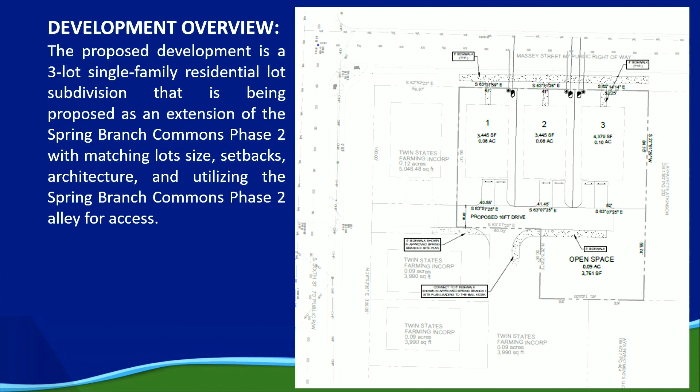The Spring Branch Phase 2 is still owned by Twin States Farming, even though a developer has a plan approved, it still hasn't changed ownership as of today. So this was Spring Branch Phase 2. That alley, as shown, would be extended; the leftmost alley would be extended up into this new property.

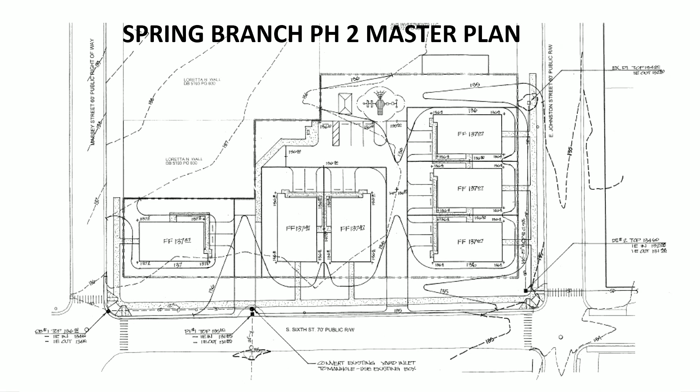These were the houses proposed in Spring Branch Phase 2 and are currently under construction in Phase 1 across the street. The Massey Street subdivision will be about the same size homes, but they will be two-story. You can see they have board and batten, lap siding, and shakes.

A little more elaborate than Spring Branch Phase 2, the plans are consistent with the comprehensive plan guidance. The comprehensive plan guides this area for medium-density residential with a density of 9.68 units per acre. This development will have a density of 8 units per acre.

The 3 lots will have street frontage on Massey, but vehicular access in the rear via a 16-foot wide private alley, again, same as Spring Branch Phase 2.

Because Spring Branch Phase 2 has not been constructed, a condition of approval would be that an access easement be secured for alley access to South 6th Street if this project were to precede the other. It needs the other project to move forward, or they would have to build an alley and an easement on that property. So that is a condition of approval because it's essential for that to be built.

The proposed development will provide 5-foot sidewalks in the Massey public right-of-way and a sidewalk behind the homes to provide access to the mail kiosk in Spring Branch Phase 2. I think they actually modified that recently with their own mail kiosk to not confuse the two different projects, so they could move forward earlier.

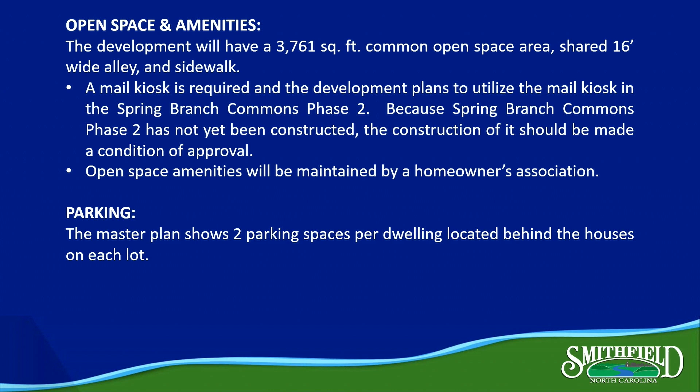The master plan shows 2 parking spaces per dwelling located behind the homes on each lot. Again, this is in walking distance to downtown. This is a development that could survive with fewer vehicles than elsewhere in town.

This development, as I said, will have 49% impervious, and that stormwater pond will likely appear on the construction drawings. They have no architectural design standards drafted. However, the footprints, again, match Spring Branch Phase 2, and the elevations they provided are fairly elaborate.

Required buffers are shown. Required trees and foundation plantings are shown. Trash will be from rollouts, and there'll be a space behind the homes for those. And another condition of approval would be to provide the matching fencing that was approved with Spring Branch Phase 2 so that it's continuous for the block.

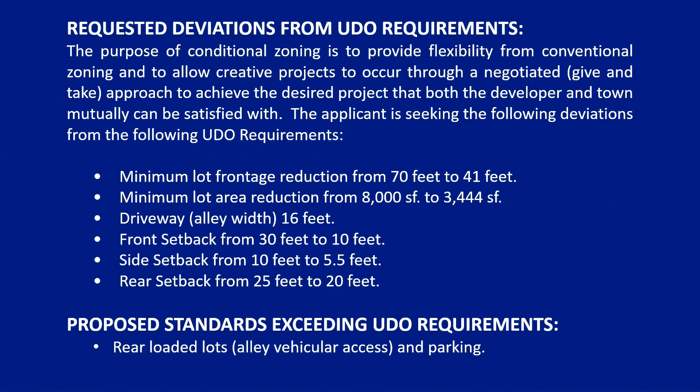These are the requested changes from the underlying ordinance. Staff finds it consistent with adopted plans, will be consistent with the Unified Development Ordinance through the conditional zoning process, and is compatible with the surrounding land uses, and in fact is designed to match what's going on next door.

So the first condition of approval is really just codifying those changes to the ordinance. Number 2 is having an access easement in the back.

This probably should be amended, that for the construction of the Phase 2 development, they should work out in their HOA agreement any shared maintenance of shared amenities. That's what it really should say. HOA standards be provided and incorporated into the HOA agreement, stormwater management be addressed, the fencing be installed to match Spring Branch Phase 2, and the storage pads for trash and rollouts be provided and screened from the public right-of-way in the rear of the homes.

With that, staff is recommending approval with 8 conditions.

Any questions? Any questions for Stephen this time? I do have a question. Mr. Winslow, I'm a bit, I don't understand the driveway. Can you help me understand that? Sure.

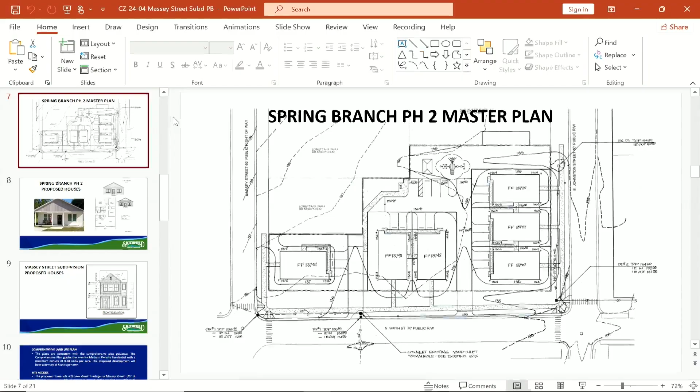You said it had to be done. Is this developer having to do that? It really depends on whether they wait for the other development to happen first, but they can't move forward without a driveway on the adjacent property. So either way, they're going to have an easement from that property owner to access their 3 lots. And whether or not they end up going before this development, they would have to build that driveway as well, in an easement.

So they're trespassing on the adjacent property to get access to their parking. Okay, and that's why you put that in the conditions like you did. Yeah, either way, they need an easement because it's a private alley.

Stephen, can you repeat what you said in the recommendations on number 3? What should that read? I think that's what you're saying. I didn't catch that entirely.

I think you said it should read: it should be contingent on the construction of Spring Branch Commons Phase 2, or they'd have to construct the driveway in an easement, and negotiate any shared maintenance of amenities. Because they had the mail kiosk on Spring Branch Phase 2.

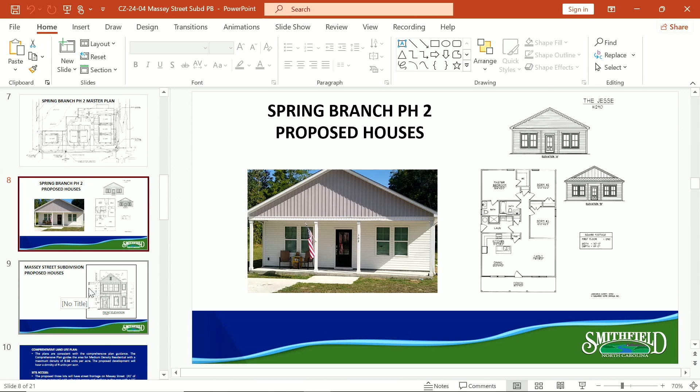Okay, and Phase 2 is going to look the same. Okay, go back to the fencing and the house slide. When Phase 1 was put in, that is a picture of what we were shown, right there. That's the type of fence they're going to put in.

So when somebody shows us a picture and it's going to be similar to this, and you look at those houses versus this house, the house that's actually there, not in this part, but in the prior part, which I don't know if this was representative of the house or more representative of the fencing they promised, when it was discussed, I think we were kind of led to believe they would be similar in nature and appearance. I mean, this has got no shutters, nothing over the windows.

Councilman Stevens isn't here tonight, and he normally heads up this charge about the architectural design of them. I don't think we're getting what we asked. But I think now's the time we need to put that in about architectural design. I will double check that. So clearly, I think we need to, what we've tried to do in the past is step up the architectural design. To make the town look a little nicer, and this is not getting it.

No shutters, nothing, on the project that's there. I'm not gonna say misled, but maybe I misunderstood what the plan was. So I'd like to see some design requirements in there similar to what we've had in the past about contrasting, which technically that has contrasting, it's the vinyl on the front and the board and batten on top. That's what they're building now, though.

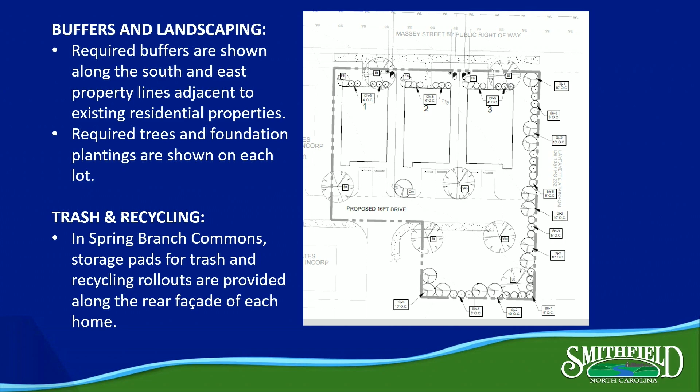How far along is phase 1 in being completed? Is phase 1 moved in? It's under construction, they've got maybe 2-3 houses up. Are people already in them? I don't believe anybody's living there yet. In phase 2, I would guess they're going to be doing phase 2 next year, if the project keeps going.

When will we get the landscaping and fencing done in phase 1? Before occupancy, looks like it's this whole thing. Okay, there's no occupancy, but they've got a table on the front porch and a flag hanging. There's no occupancy in the house? You saw a flag and all that, a flag on the front porch and a table on the front porch. Is there no occupancy in that house? It could be, sorry, I didn't notice. So we don't have a fence, we don't have anything, but we've got people in the house. They'll have to build it before the project's done. They don't have to build it before you have occupancy?

I'm surprised there aren't shrubs. I'll go back and follow up on that. I don't remember if this was an example or if this is actually the house out there. Oh, I know what this is, this is a house on Wilson's Mills Road that he built in the same style. Okay, that's why it looks the same. There are about 3 of these homes already built out there, not occupied, but the same plan.

That actually does come from the presentation I presented at the meeting. And this other slide was a picture of the fence, because he was asked to give an example of what the fence would look like. That was the picture he presented. It all came back to me. But you're going to present to us what they're supposed to look like. I'll verify it, but now I recall this slide came from Spring Branch Phase 2.

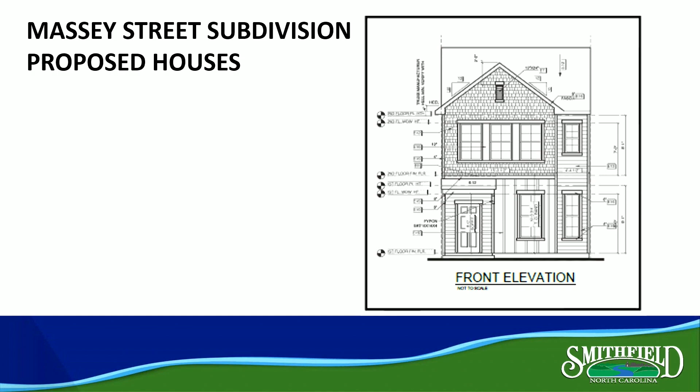One last question, Mr. Winsman. Yes. You speak of the HOA, is this going to be an HOA for the 3 houses or the total subdivision? Three houses, unless legally they combine all of them, which that'd be up to them to do, but they need an HOA to maintain any common amenities, and they're going to have the shared driveway, they're going to have the mail kiosk, they're going to have a stormwater pond, and that's probably it, but maybe a sign.

So, it is. How many, okay. I don't know how you could enforce them because, again, this is separate from the other project, but it's together, so that could be a problem later. I mean, they could legally do it, but it would take agreements.

Wouldn't you agree, Bob? It would take restrictive covenants usually. What? They take restrictive covenants. Sometimes they're homeowners associations, and sometimes they're not. It's such a small number of lots, you know. But they'd have to have a mutual commitment as to what the standard is for repaving the road.

Well, should that condition then be amended to say restrictive covenants instead of an HOA agreement, or is that the... Say restrictive covenants or, okay. Thanks for that clarification. Right. Yeah, HOA agreement or restrictive covenants. So what do we do now? Bob says it should say HOA documents or restrictive covenants, because of the small number of lots.

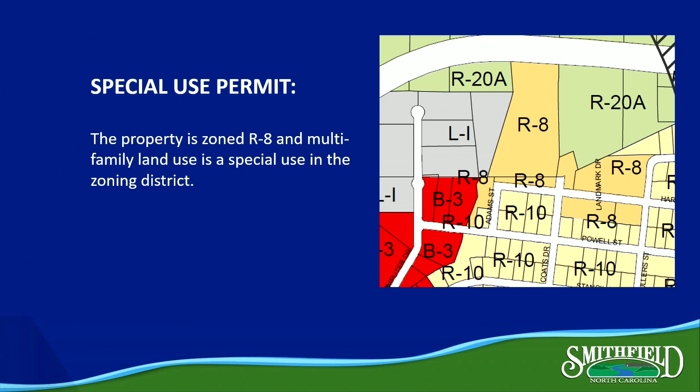So this is the property, and you can see it fronts on the Hartley right-of-way, but Hartley street is not built. It stops right at the intersection there, so they would be extending Hartley to provide access to this property. There is a Coats right-of-way that heads north that seemingly would provide access, but that is unbuilt and currently used for a residential driveway.

Where's that at, Mr. Winsman? Coats, you see how Coats, as you follow Coats north? There's a house at the end of Coats, right at the very end of it, and they have a driveway that runs through that platted right-of-way.

So in either case, neither that piece of Coats nor Hartley Drive are constructed. The developer has chosen to build out Hartley Drive to provide access. You can see to the west is some light industrial, R20A land in the northwest and east, and then R8 and R10 zoning in the neighborhood.

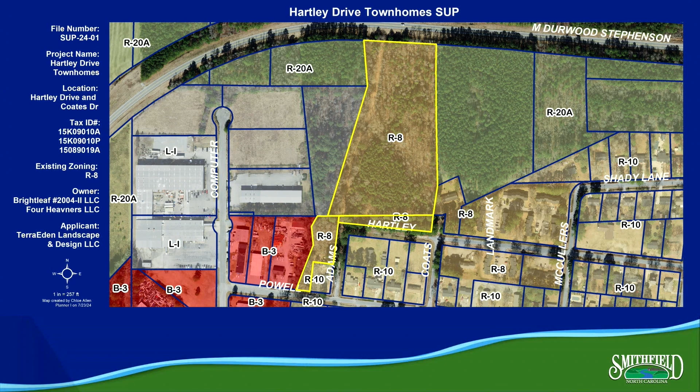So the applicant is TerraEden Landscape and Design. Paul Embler is in the audience, he'll probably speak later. The Heavner family owns the property.

This is West Smithfield, so Duke has electric power, but the water and sewer would be town of Smithfield.

Right now, the property is vacant and covered with woods. There are deep drainage ditches running east to west near the Hartley Drive right-of-way. There are no wetlands or floodplains on the property. There is an existing 20-foot sanitary sewer easement, highlighted in yellow, running north-south on the west edge of the development site.

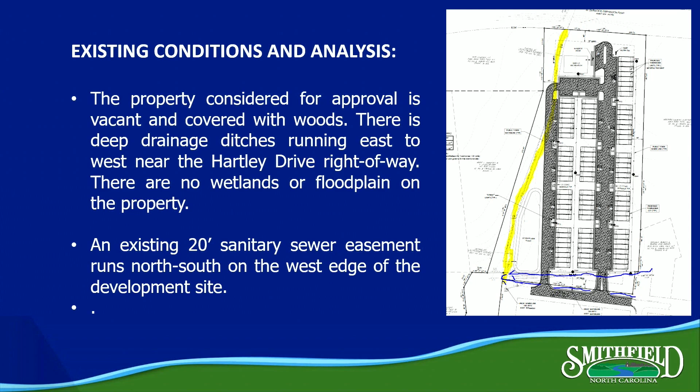Just want to point this out, there are some landlocked parcels in the neighborhood, right around that property. I don't believe it makes sense that this development would provide access.

There's no public street being proposed through this development. It's just a private HOA amenity parking lot providing access to the lots.

Number 1 and 2 are seemingly some of the same ownership. They could get access from Computer Drive through the lots that those owners currently own.

Lot number 3 is owned by Mr. Meacham from the funeral home. He owns that and all the parcels to the east to Wilson's Mills Road. So technically, there's access on Wilson's Mills Road for all the properties he owns. It doesn't make a great access because it's so close to Durwood Stephenson, but technically, he's not landlocked if you combine all of his properties.

There is some potential opportunity to gain access where Shady Lane turns and runs north-south. They're really close to the right-of-way there, and something probably could be negotiated for a second entrance if that were to develop in the future. But I did want to point out that there are some properties that have difficult access, probably created because Durwood Stephenson came through and cut off all other access.

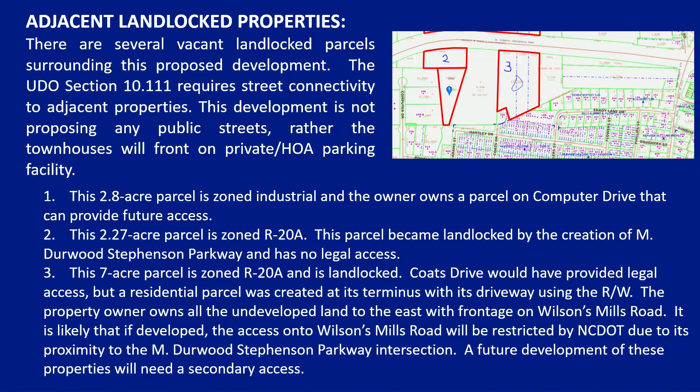So as I said, multifamily is a special use permit requirement in the UDO. They need to comply with Article 7, Section 7.35, which are the supplementary standards for multifamily. This project meets the density requirements of the comp plan. It has street frontage, as I mentioned.

This is the proposed development, so it'll have 2 entrances off of Hartley Drive, 3 rows of townhouses fronted on a private parking lot, and a mailbox, kiosk, and amenity area at the end of the development.

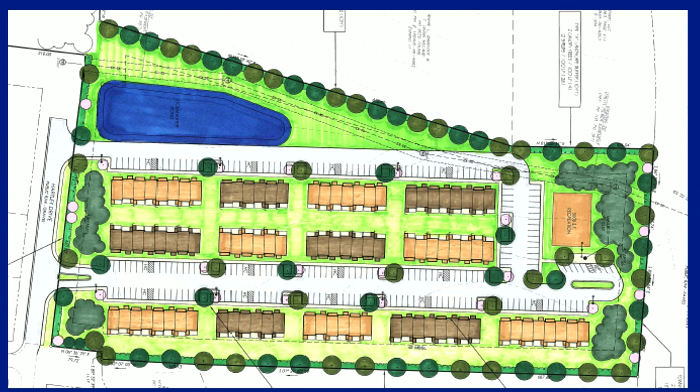So the way this is laid out, they meet all the relevant codes in the UDO. They have a type A buffer along the sides and rear of the site, except for a type C screening fence that will be provided along the adjacent property with the industrial use. They'll also have a standard street yard along Hartley Drive, which is a requirement.

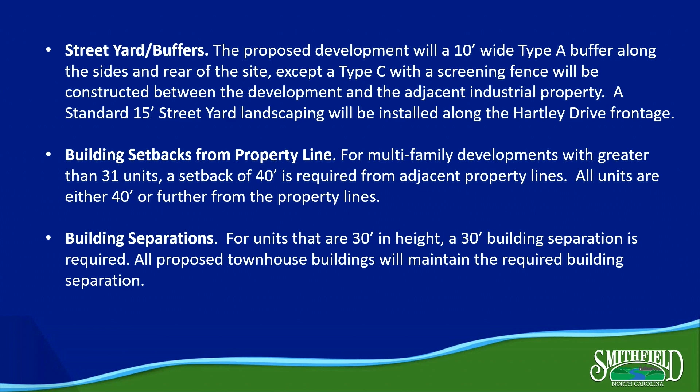With multifamily developments greater than 31 units, they're required to have a setback of 40 feet on the perimeter of the site, and they have complied with that. They're also required to have a building separation of 30 feet between buildings based on the heights of the buildings, and they've complied with that requirement.

The existing Hartley Drive is a standard DOT design, about 20 feet wide with ditches on both sides for drainage. The extension of Hartley Drive will be 27-foot back-to-back, meeting town local street standards. So there will be a change as you go through that intersection, it'll become a more modern street. The end of the road will function as a hammerhead for large vehicles to turn around, and this has been reviewed by the fire marshal, who didn't have any issues with how it ends.

Because this is a driveway, not a street, they'll have to provide a standard driveway detail entrance into the development. And they will be required to construct sidewalks along Hartley Drive.

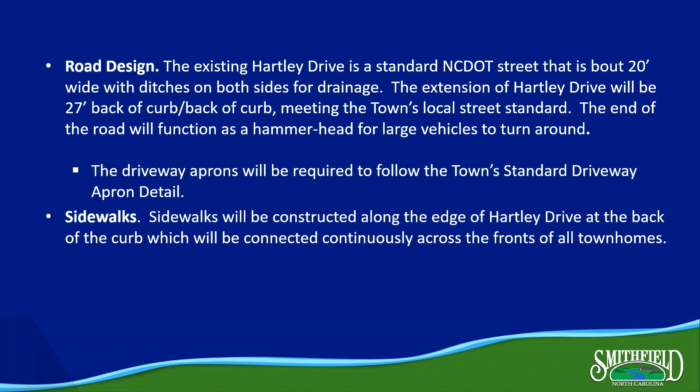The individual townhomes will have 2-foot modulation to break up the mass and bulk of the units. The facades will do this by stepping 2 feet with the units, breaking up the mass and the bulk. There will also be small entrance porches on all the units.

Corner lots will have ground floor and upper floor windows. Each unit will have a patio and storage area. The building materials will be vinyl, brick, and stone, but they've not been identified.

Unit width will be 17.5 feet, so these are about as narrow as any townhouses we have in the town, the same as East River 6 and 7. If you've been out there, they're recently constructed, so it'll be the same width. Building height, again, is 30 feet. There'll be 6 to 8 units each building. Each unit will have 36.75 square feet of storage, which is more than required in Article 7.35. Each townhouse will have multiple building materials and colors.

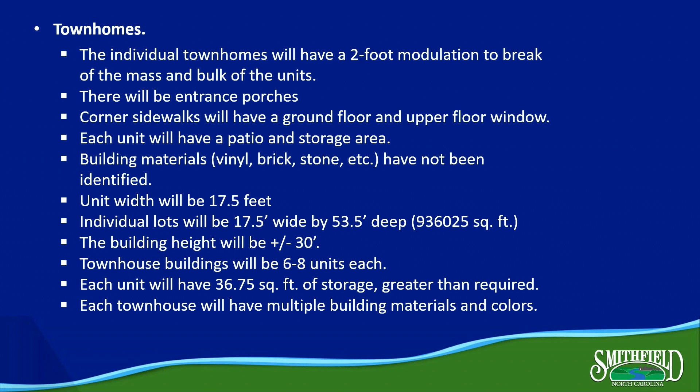Each unit will have a roll-out trash container to be stored in the rear of the building and pulled to the adjacent medians for trash pickup day. They'll be pulled up to those medians, and there's a median like every 15 parking stalls, so they'll be stored there during trash day.

As I mentioned earlier, there'll be 5,000 square feet of recreation area at the north end of the development with a parking and mail kiosk, which meets the recreational requirements in Section 7.35 of the supplementary standards. The developer has not indicated whether there will actually be a play apparatus, a tot lot park or not. We don't know. It's not required.

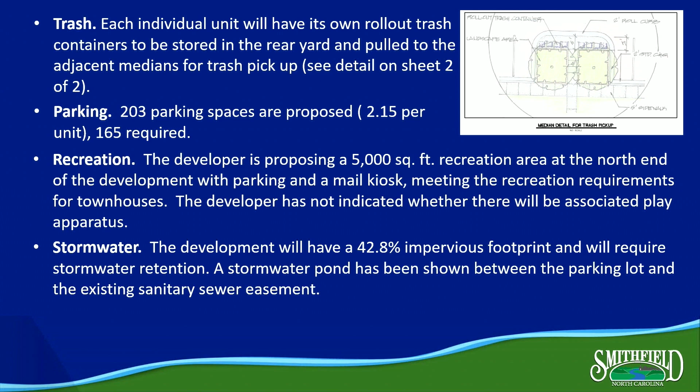The development will have an impervious footprint of 42.8%, which requires a storm pond, and they've provided that. So they're meeting stormwater requirements. There will be an HOA to maintain all the common amenities.

The developer is proposing to run public water and sanitary sewer into the site for taps to individual units. A 30-foot wide easement will need to be provided over that line.

No development signs have been identified at this time. If they do propose them, they will need to provide them in the open space near the entrance.

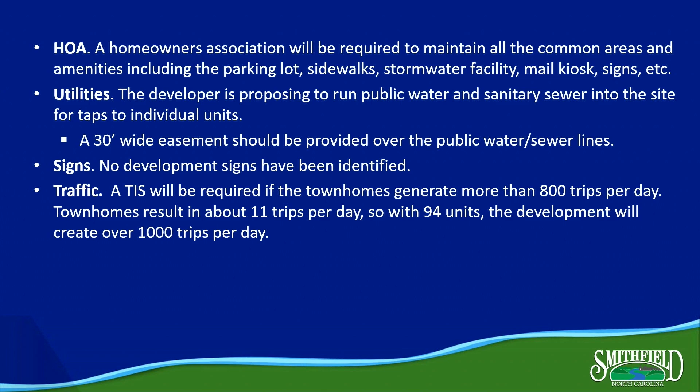A traffic study will be required with the plat because this project will generate more than 800 trips per day, which is the trigger in our code. At that point, I anticipate some kind of study to see how impacted the intersections will be right at Hartley. And the question will be, should additional street be provided, completing that block past the townhouses and then to the south? I believe that study would decide to what degree streets should be built.

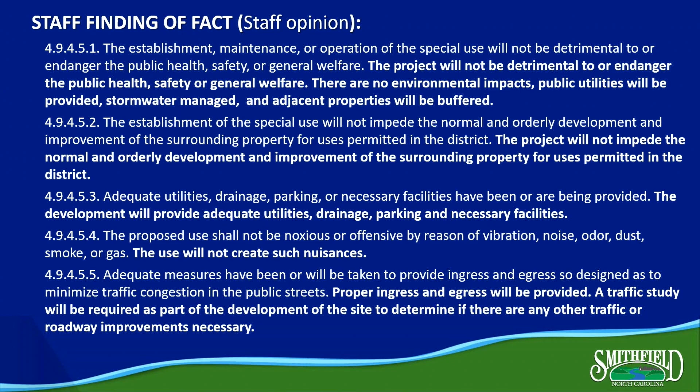So with a special use permit, there are a number of findings of fact that need to be met. Staff finds all of them to be met, and only if it can be found that a particular finding can't be met can this project be denied. It would take a 4/5 vote of the board to agree on that. I can go through each of the findings, or what's the council's pleasure?

Could you, just so we have a better view, because I looked at it on the map, can you actually go to Google Maps and bring up the satellite view of what we're talking about, so we can look at those roads? Now, is Coates Road a gravel road or paved road? You said you used it as a driveway. Is it a gravel road or a paved road? It's paved until you get to the Hartley intersection, then it's someone's driveway. It's not built to the north of that. And Hartley's not built to the west of Coates.

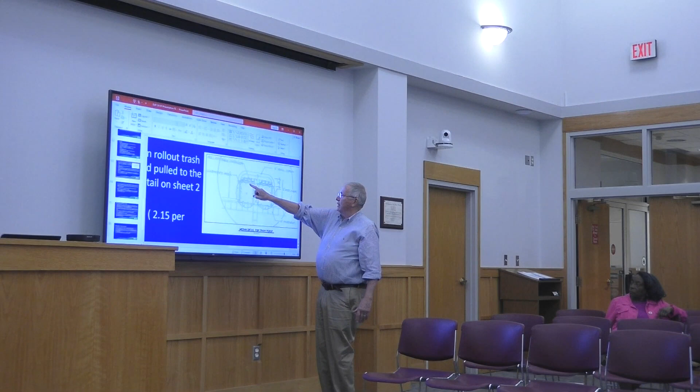They can roll it out, come around the back of the unit and come in, and then take their trash things. These will be numbered out here per the unit, so the unit on this side and the unit on this side can bring it into the middle and put it there.

And the maximum number of units we have in a building is 8. There's a reason for that, because after you go past 8 units, you have to build to the commercial building code and not the residential building code.

So you don't have to walk real far to get to one of these trash bins. They're not bins, there's just a sidewalk with a number on it, and it's got a rolled curb on it, so there won't be any trying to pull it up over the curb. You can just slide it up, park it, and then at the end of the day, come back and get it.

And Councilman Dunn made the statement about the fence. Can you go back to the render? So would each of the apartments or homes have a green space, but they wouldn't be allowed to put a fence that could block the access for all others' trash? Does that make sense?

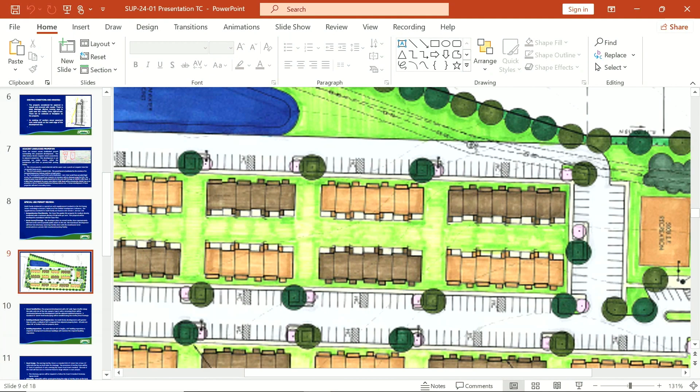My personal recommendation, when we get to that stage, would be not to have fences in a townhome development, because it presents problems, just as you mentioned.

Thank you, I appreciate it. So again, just to be clear, the end units won't be able to put an extra fence up. That'll be up to the homeowners, but they can't.

Everything in this development, even outside the skin of the building, will be proposed to be in the HOA. For long-term maintenance and operation, you want the appearance of the units to be maintained. The only way I know to do that effectively is in an HOA.

Now, it can be done differently. I've done developments in the past where the whole development is in one HOA, but the individual units have their own too. My son Brett owned one up in Apex, that block of buildings with 8 units had an HOA for that building and then one for the overall. That's how they maintained theirs, so they didn't have to do each building at the same time every so many years.